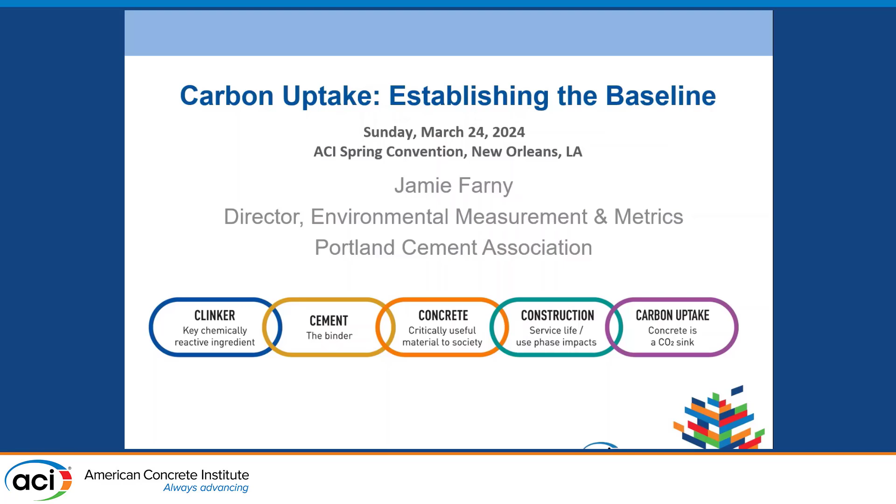But I'm going to take maybe a higher level view. I'm not a cement chemist, so I'm going to try to make it somewhat more relatable for the average person. So I'd like to talk about carbon uptake, just what it is, that we're recognizing it more and more. Briefly go over the chemistry. Craig gave you really in-depth chemistry. I'm going to give you the ABCs, the really high-level view of it, and what it contributes to carbon neutrality. The importance of the baseline for measurement and reporting.

You heard Craig saying that we're doing all this work to really dial that in and get it accurate. And we want to be able to quantify carbon uptake at the project level, and also, I guess you could say, at the country level. There's current data gaps. Again, Craig is filling in some of those. There's opportunities for research and data. So that's what we're just going to touch on.

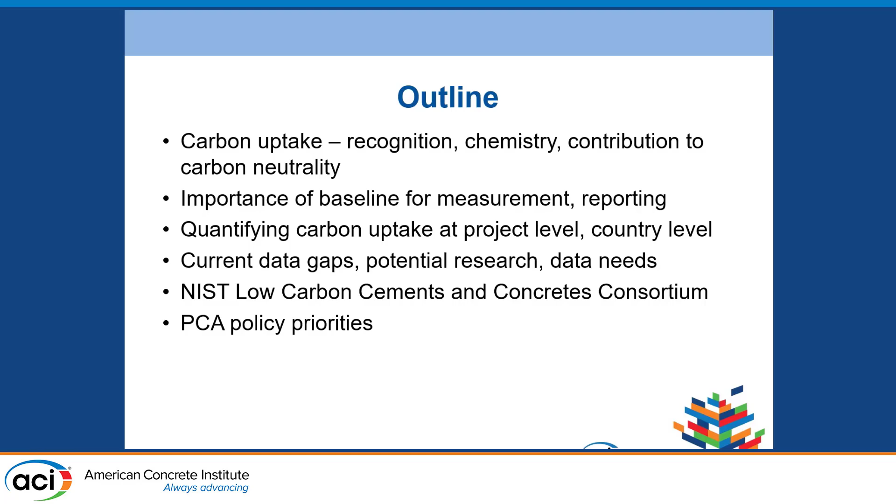There's an activity at NIST, Low Carbon Cements and Concretes Consortium. I'll just tell you briefly about that. They will be meeting here, I think, Tuesday afternoon. I think they're still looking for more participation, if anybody's interested in the topic. And then I'll kind of frame it up with PCA's policy priorities, what we're working toward, what we'd like to see.

So there are some key resources. Craig touched on them. The idea of carbonation occurring in concrete has really been known about for a long time. But it's probably 2005 by this researcher Lagerblad with the Swedish Cement and Concrete Research Institute, who put the idea of carbonation in terms of life cycle. So what's the CO2 uptake of concrete during its life cycle, however it's exposed? You come to 2017 and you've got that British standard EN 16757 on PCRs and EPDs. They have that Annex BB that is about the guidance on calculating CO2 uptake.

You come in this 2021 period and you have the IVL Report B 2309, the IVL Swedish Environmental Research Institute report. Again, the title, CO2 uptake in cement-containing products. And then the big one here of everything is this assessment report by the IPCC. I got it on the next slide. But this is a comprehensive assessment report on climate change. So it's not just cement, it's not concrete, it's everything that contributes to carbon dioxide in the atmosphere.

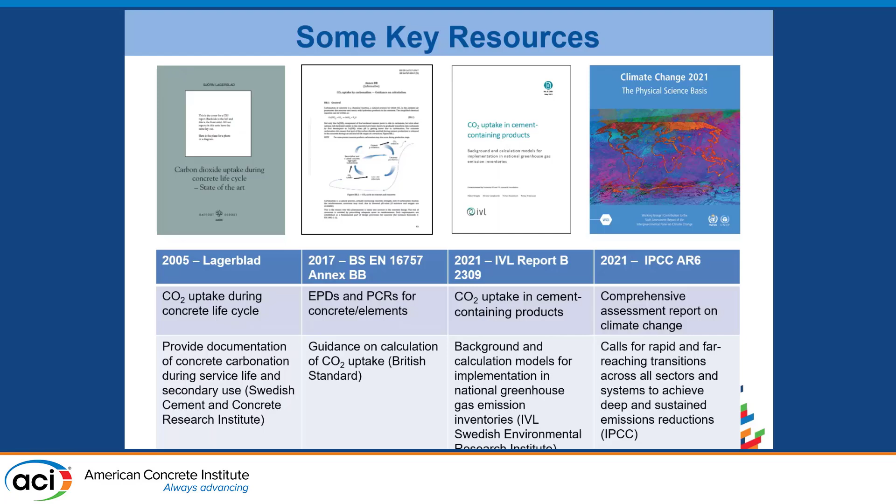So this one is the 6th time this report was put together. The good thing for us is they recognize carbonation. They say CO2 emissions from carbonates in cement production are on the order of 4% worldwide. So where does cement fit in? I work for the Cement Association, and I know our manufacturers hear it too. Is cement the bad guy? Can we have a world without cement and concrete? So we got a target on us, and this is putting what we're responsible for into context. 4% is a relatively low amount, but of course we could do better.

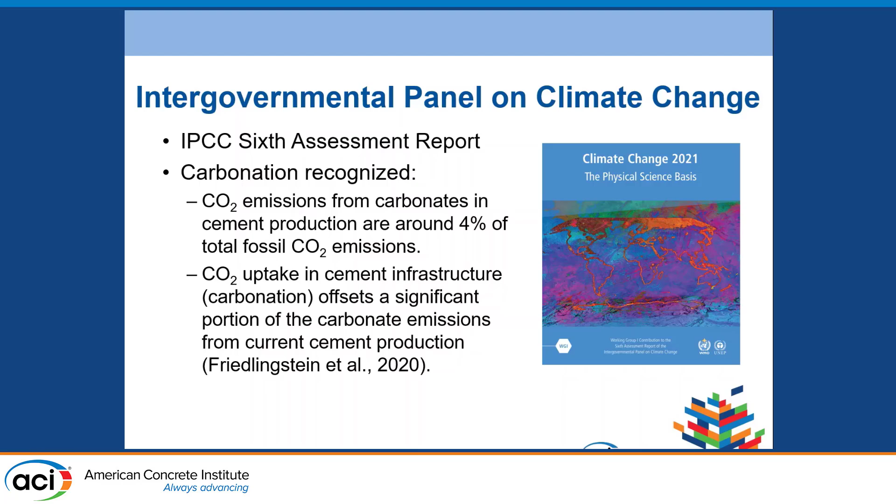And then the other thing that this report says is they recognize that the CO2 uptake due to carbonation will offset, like you saw Craig report on, a significant portion of the emissions that come from manufacturing cement. So it's that idea that we can pull it back out of the air. It's just going to happen. We don't really have a choice.

So again, PCA is the Portland Cement Association. We represent U.S. cement manufacturers. We have a counterpart, GCCA, the Global Cement and Concrete Association. They represent manufacturers of cement throughout the world. We both put out a roadmap to carbon neutrality or to net zero. PCA's was published October 21.

We took this approach, what we called a linked value chain of the 5 Cs. So we make clinker, we produce cement from that, we make concrete out of it, we build with it, so construction, and then carbonation is the last C in the 5 Cs. And that's the idea of, again, concrete is a CO2 sink. So we have it going from 2030 up to 2050, with the amount of carbonation taken up by concrete that's out there increasing.

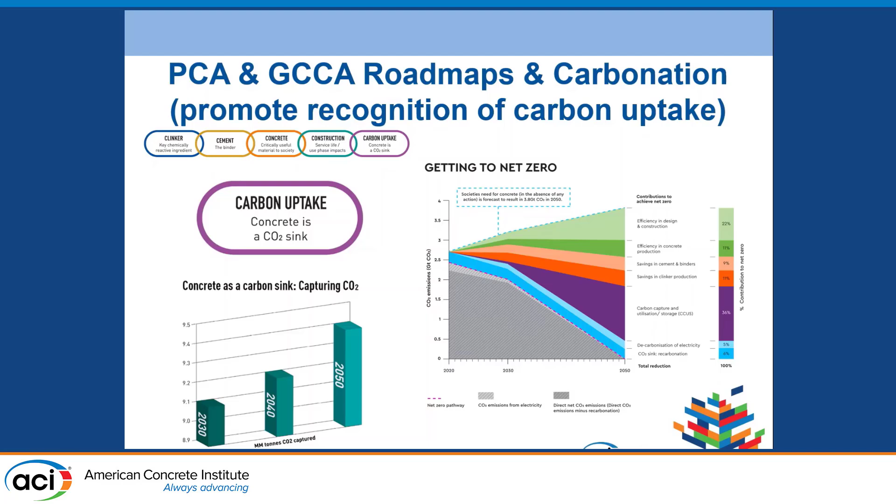It's on the order of 10% per year, 9, 10, something in that range for us. GCCA took a little bit of a different approach getting to net zero, and you can see it's very dynamic. They show you 2020 to 2050. The CO2 sink, recarbonation, sometimes it's called that, they have it at about 6% for every year. Again, it depends on the mix of everything else that you're doing, but something on the order of 6 to 10% might be what you'd expect to see.

This is where I wish Craig and I, we had dinner last night together, we never talked about slides, but when you manufacture cement and then what happens with carbon uptake, so manufacture, you saw all the really complex chemical equations that Craig showed. I'm going to dumb it down because that's more what I can understand. Calcium carbonate, limestone, right, the primary ingredient. We add heat to it to break the chemical bonds so we can get at calcium oxide, lime, the backbone of cement. But when we do that, we drive off CO2. Everybody, I think, is familiar with that in our industry at this point.

Hydration, that CaO, again, very dumbed down, not all the complex equations. There's a lot of different equations that occur and sometimes in stages, but we hydrate that and we get calcium hydroxide. Again, here's the simplified part of it, that calcium hydroxide and other phases will combine with CO2 to go back to limestone or calcium carbonate. So it's that idea of a cycle and water. You can show it on a micro scale kind of here, so calcium carbonate to calcium oxide to calcium hydroxide, production, hydration, carbonation. They're constantly looping like that.

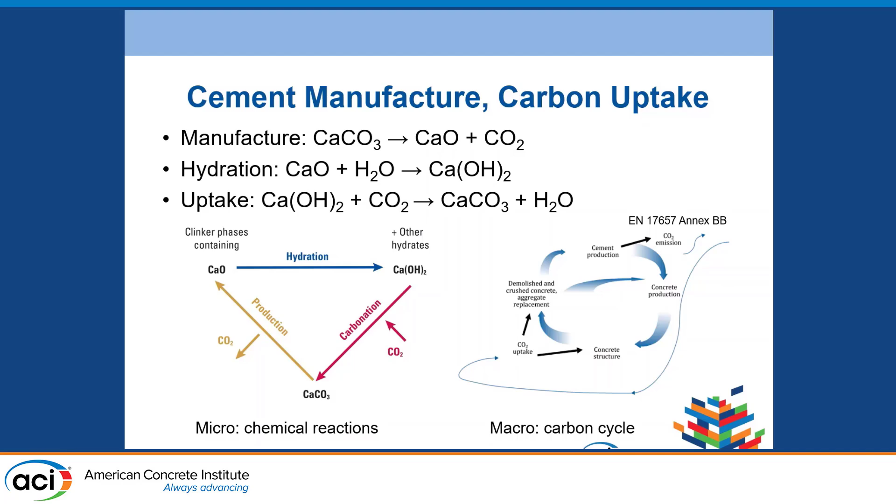If you look at more of like a macro scale on concrete now, we make cement, the CO2 gets driven off. This is a picture right out of Annex BB. So we're driving off CO2, we're producing concrete with it, that structure is gonna pull CO2 into it. And again, what happens when we demolish that structure at the end of life, crush up the aggregate, whatever. We got this cycle. So always this idea of a cycle. When I first started, there was a nice little brochure at PCA that talked about the lime cycle. This is really the lime cycle, if you will. So the baseline for carbonation then is clinker production.

Producing clinker generates CO2. And it's roughly almost as much CO2 as it is clinker. Fuel emissions, whatever we're doing to heat that limestone up, we don't get those back. So whatever we can do to keep the fuel use low, that's good. We won't have to worry about recapturing that somehow because we can't do that. You saw Craig talk about this, the calcination emissions, which are about 60% of the CO2 emissions at a cement plant. That's the theoretical maximum uptake.

And I say theoretical because you saw Craig say, we expect even with block, which is really porous and open structure, they're only looking at maybe 75% that they can get back. Some of that unhydrated cement isn't even available to take up CO2. So still, over geologic time, 60% of the emissions that we needed to get to cement, to make and build all the things that we like building, we can get 60% of those back.

So this roadmap, again, the idea that PCA looked at this and tried to compartmentalize everything into one of those C's, there's multiple levers that we have to reduce CO2 emissions, and we really want to use all of them. So it's things like reducing the clinker factor. So for every ton of cement that we make, it contains right now, currently on average, about 0.91 tons of clinker. So there's 9% other stuff in there. By 2050, we're hoping that we can get that clinker factor down to 0.75. So we'd be putting in 25% other materials.

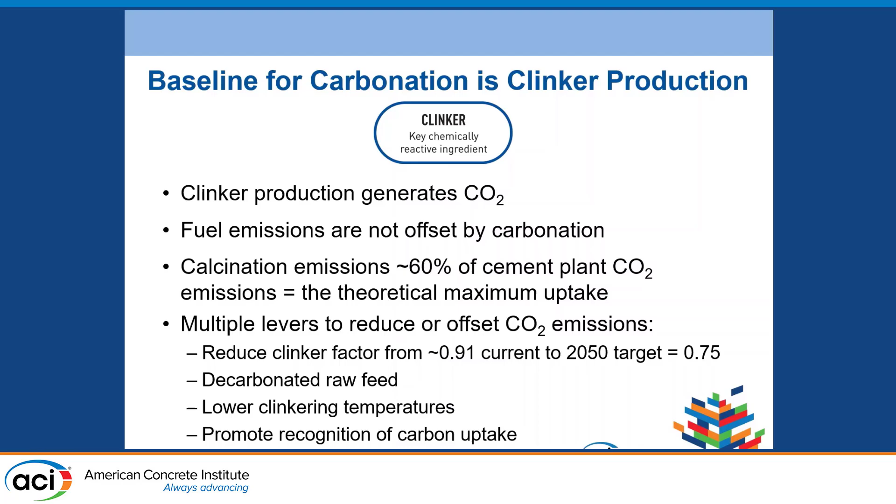And then this idea of promoting recognition of carbon uptake. So it's an all of the above approach. All of it's important. I'm shouting out MIT's work here, and probably Bensu's going to talk a little bit more about this. Two more speakers, I believe. But PCA helps through the Concrete Sustainability Hub at MIT. Hassam and Bensu, of course, work there. We help support their work.

One of the things that they did was develop a really nice little calculator. Online, you can go to MIT's CS Hub. You can download this in Excel spreadsheet format. It's really nice, and it takes into account some of those key references and others, the Annex BB, the IVL report, Lagerblad. It's got data that it's drawing from all of those. And it says, just fill in these little boxes for us here. We got drop downs for you. What's the time? What's the life cycle? How long is that structure expected to live?

Geometric and locational characteristics. How much volume of concrete? What's the surface area? How is it exposed? Is it in a wet or a dry condition, inside or outside, above or below ground? Those sort of things. So you've got all these factors built in based on a lot of that research, a lot of these key reports for the last 20 years or so. You've got cement, you've got mix design. So we can just consider that like by strength, because as you saw Craig talk about, your more porous materials, your lower strength materials generally, those allow carbon dioxide to work their way from the outside in. So that's what this calculator does.

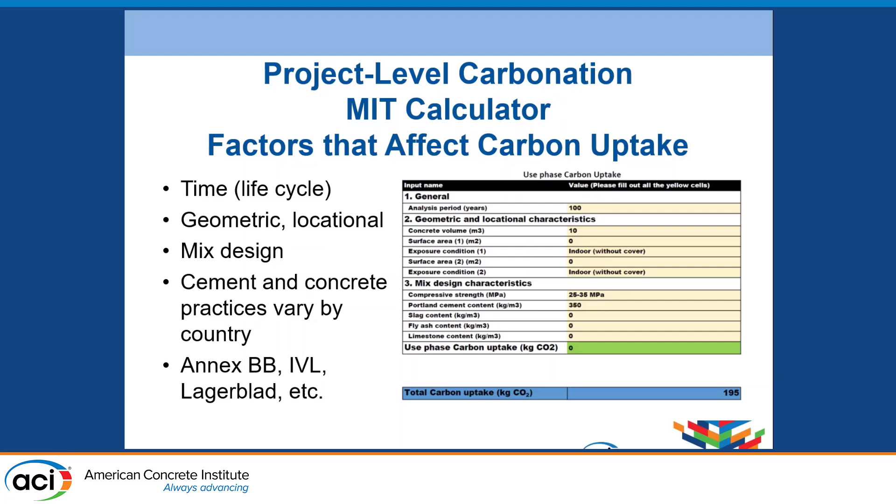It pulls all that together, and we know cement and concrete practices can vary by country. So it doesn't matter if you put in a blended cement or if you put in a fly ash or a slag at the ready mix plant. We've got the characteristics all kind of spelled out here. You can pick what you want from the drop down. So then this green box actually calculates what your use phase of the carbon dioxide is. So that's as the concrete's exposed. And we can see for this particular thing, it was 195 kilograms of CO2.

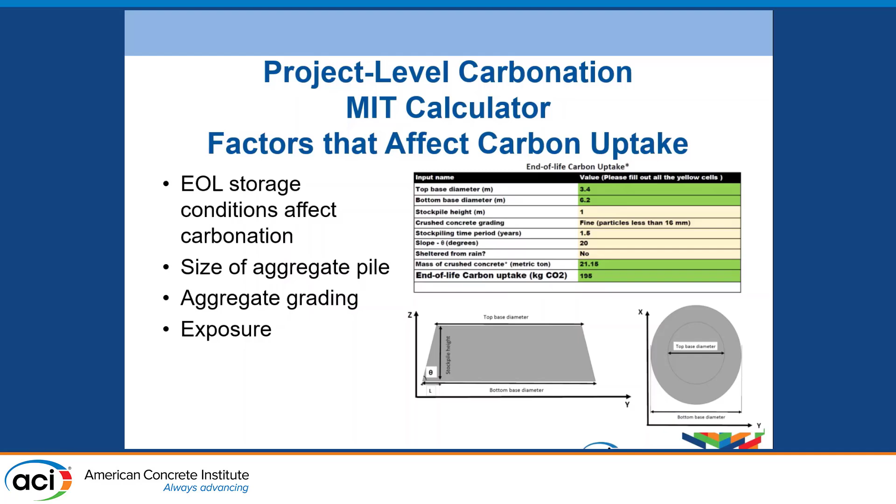The second part of the calculator is what do we do for the end of life? So end of life storage affects carbonation. How we store it matters. What's the size of the aggregate pile? How big across the bottom, the top, how tall it is? What kind of grading? If we keep it uniform grading sizes in that aggregate pile, air can work its way in better. So we actually want that kind of exposure. So again, the exposure conditions, we put all those into the drop-down boxes, and we get an end-of-life carbonation uptake here. So those two added together give us our CO2 offset or emissions. That's kind of a project-level idea.

At a country level, this is where that IVL report comes in. Again, PCA helped support the work that resulted in this document. So the Swedish Research Institute, again, May 2021, they come up with 3 methodologies. They call them Tier 1, 2, and 3. Tier 1, simplified. Tiers 2 and 3, you need more effort. You need more data. You need better analysis, higher level analysis, better tools, more specificity. What's really the numbers for you and your country and where you are?

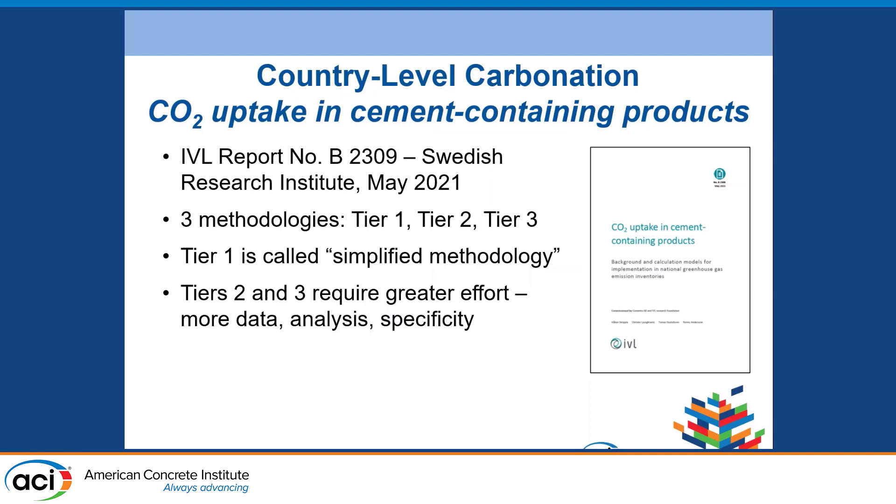So if we're just going to look at Tier 1, which was what I told Hassam we could have time to go through, that's your first estimate. It's a conservative estimate for the use stage, end-of-life stage, and secondary use. The uptake values are related to the calcination emissions. Again, this is why it's so important. We have to understand how much cement is produced. We have to understand what the emissions from that are. That's our baseline. Just like Craig talked about the background interference, we have to know what we're starting from.

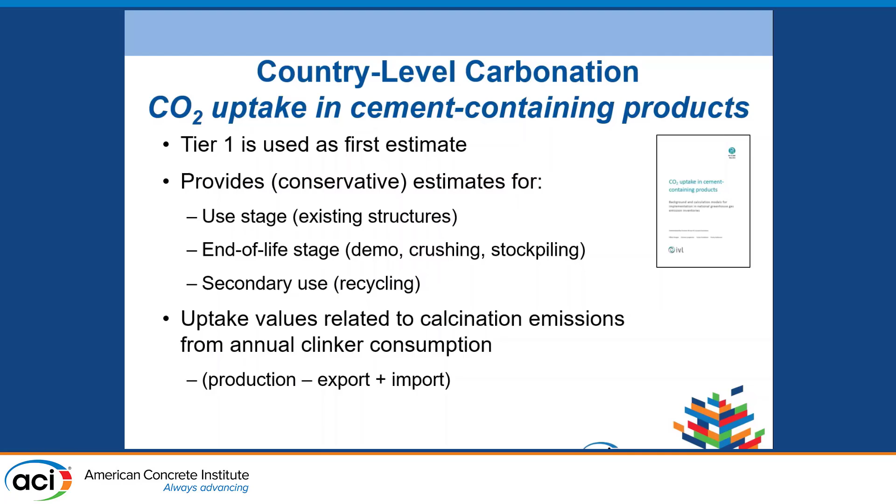So it is the production in a country minus the export plus the import. How much concrete are we building in that country? That's what we're trying to get at with that aspect. And then the CO2 uptake for existing structures on a national basis. So we use an annual clinker consumption data piece for this. We take a 20-year average. We even out the highs and the lows. We smooth it out. How much cement is being used in that country and then how much are we going to be able to get back in terms of what happens with the carbonation of that concrete that's made with it.

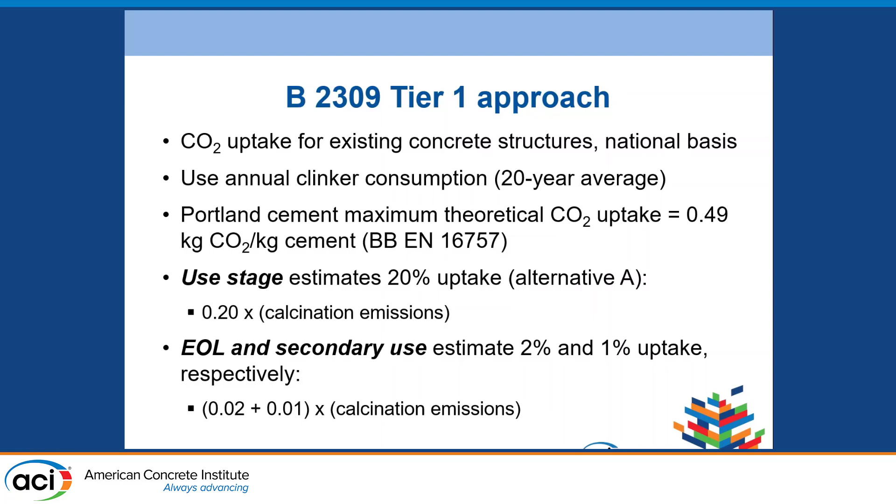So from that other BB annex report, the maximum theoretical CO2 uptake that they've established there is 0.49 kilograms of CO2 per kilogram of cement. So the use stage says we're going to get 20% uptake of the calcination emissions. The end of life and secondary get 2% and 1%, so 3% of the calcination emissions.

So if we had a country using 10 million metric tons of Portland cement annually, and that emissions factor that we just covered, that country is contributing, again, globally, 4.9 million metric tons of CO2. This is where that 4% idea comes in. We're adding all of those up. So the use stage, if we take 20% of this, we get 980,000. End-of-life secondary use, we're going to get another 147,000.

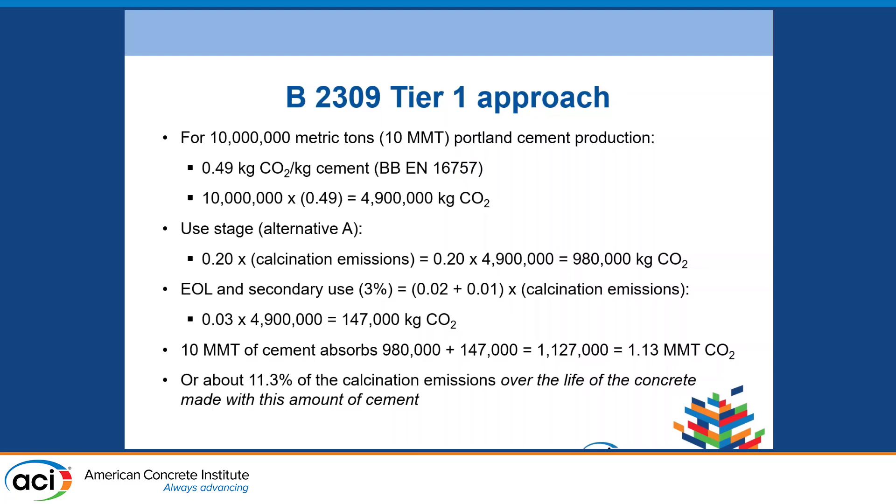So 10 million metric tons of cement will absorb 980, 147, 1.13 million metric tons, kind of on a national scale, you could think of this. So about 11.3% of the calcination emissions over the life of that concrete for that amount of cement. Just again, kind of a ballpark calculation here, a starting point, if you will.

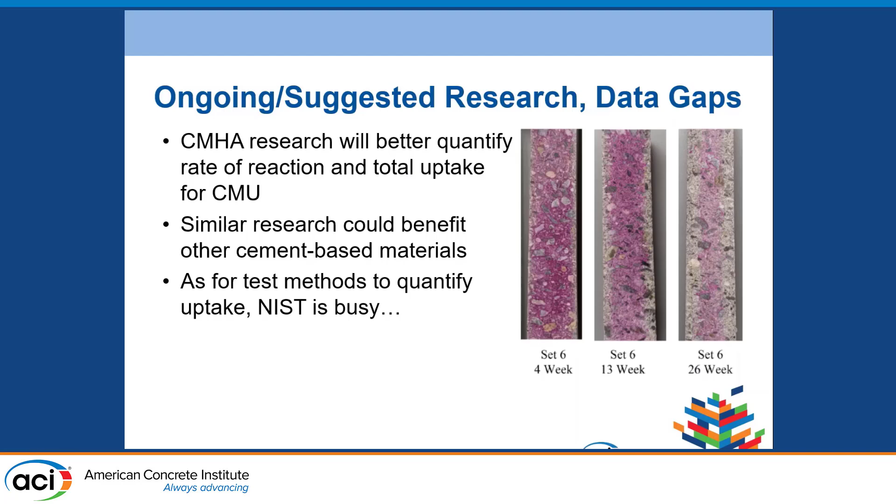So this is qualitative. We're not able to calculate a CO2 number from this, but it is showing us what's happening. And then we're going to figure out how to quantify it. That's where NIST is really coming in and helping. So again, this group called LCCCC, Low Carbon Cements and Concretes Consortium, started in 2022. Their charge, if you will, is to develop traceable and accurate measurement techniques. So standardized techniques to measure carbon and carbonate in cement-based materials.

You saw Craig talk about how it's kind of difficult. Are we getting accurate numbers when we're doing this? So they want to create this information to inform the guides and the standards and the specs. They're doing that through 4 work groups: quantifying carbonates, specifications, carbon accounting, and novel materials, products, processes. So that's really the work that is going on right now to help us get to a better understanding of what we can measure.

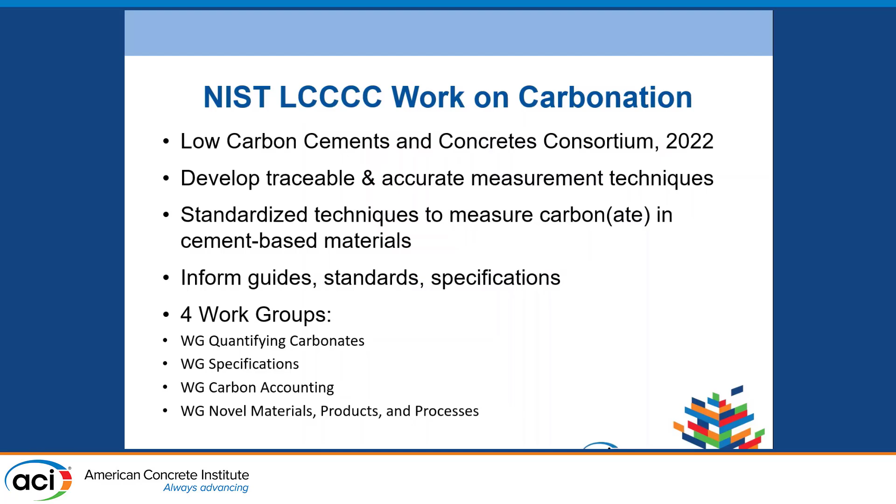And you heard Craig talk about TGA, thermogravimetric analysis, where we grind up a sample, we burn it, it drives off different species at different temperatures, so we know exactly how much of it is in there. The phenolphthalein test that we saw is just a visual, qualitative test with the pink color or not. There's a lot of other things that NIST is looking at. Can we use IR, infrared analysis, or mass spectrometry, or X-ray diffraction?

So they want to have a lot of different test methods available so we can accurately quantify how much carbon dioxide is being pulled into our materials. How much of a sample size do we need? Concrete has coarse aggregate in it. Mortar has just fine aggregate. All those background interferences that Craig talked about, we have to be able to pull that out, and we have to get accurate CO2 measurements.

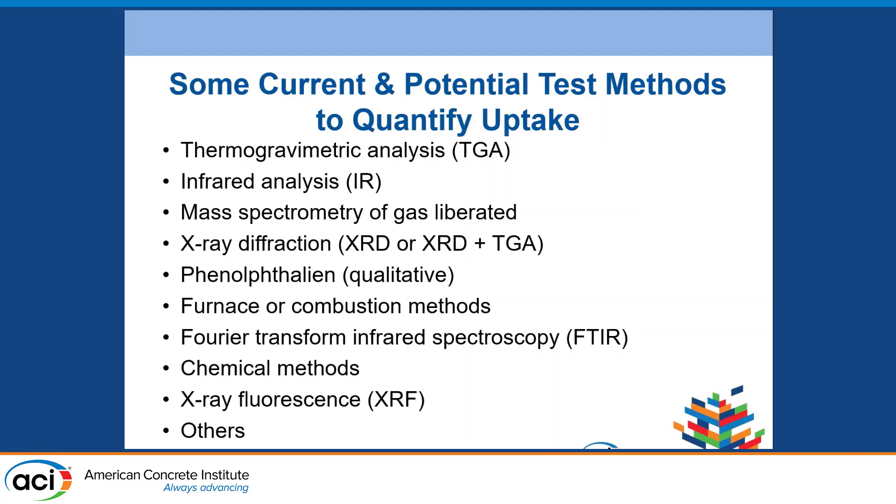So wrapping up, how PCA is involved and why we're involved. Again, our manufacturers are responsible for CO2 generation. So we want recognition and validation for what actually happens with carbon uptake. Are there established or accepted methods for calculating it and for quantifying it? Life cycle consideration. We, as the cement industry, as the concrete industry, have environmental product declarations that put us at pretty high embodied carbon and pretty high embodied energy materials. But that's only a piece of the story.

It's the beginning. If you don't look at the whole life cycle, then you're really not maybe making your most sustainable choices, because that's where this is heading. EPDs are going to be used to inform what people are building with. And the EPA has a big grant program out right now to put money into the system so that we create more EPDs. Again, EPDs are an important piece of information. How we use them, life cycle assessment, that's really good.

That'll inform sustainable procurement policy. If we really want to have an impact in driving down the CO2 of what we're building with, you got to look at the whole picture. And then more research on the life cycle carbonation and the benefits of concrete materials, including the end-of-life treatment.